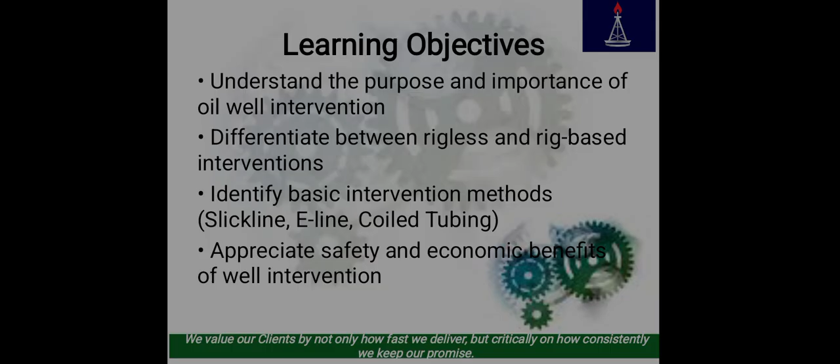Introduction. Oil wells are dynamic assets. Production and integrity change over time. Well intervention refers to any operation carried out on a producing or non-producing well to restore, improve, or manage performance without drilling a new well.

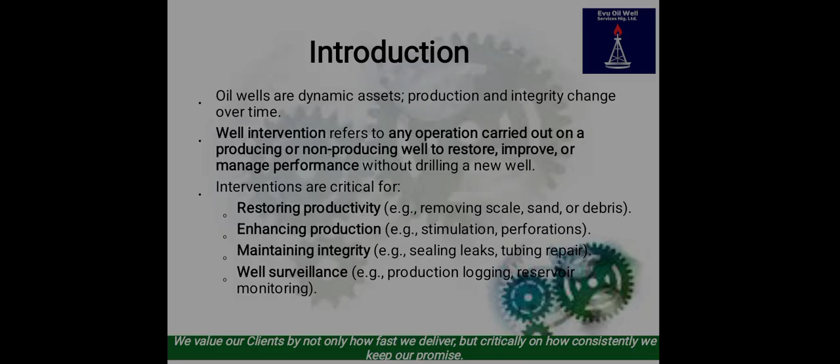Interventions are critical for restoring productivity, such as removing scales, sand, and debris, enhancing production. That's where we'll start talking about removing damages in the near wellbore through stimulation or reperforation, maintaining integrity - that is, sealing leaks, tubing repairs - then well surveillance, such as production logging, reservoir monitoring, and characterization.

We have two categories of well intervention, and the first category falls under light well intervention, which is usually the rigless. It's performed without a drilling or workover rig. Uses slickline, electric line, coil tubing, or light vessels. Quick, cost-effective, and less intrusive. Examples of tasks that require rigless activity: shifting of sleeves, setting of plugs, acid stimulation, well logging.

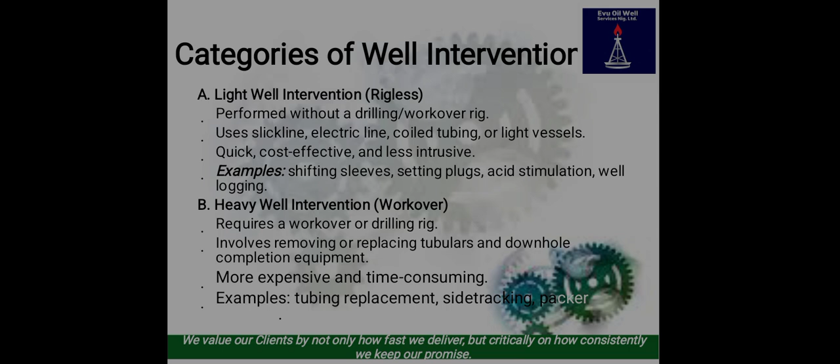This now brings us to the second category, the heavy well intervention, which of course is mainly the workover. It requires a workover or a drilling rig. Involves removing or replacing tubulars and downhole completion materials and equipment. It's relatively more expensive and time consuming. Examples are tubing replacement, sidetrack, and packer removal.

Methods of well intervention: we're having, like I said before, under the rigless, slickline. We'll be talking much on the rigless well intervention.

Now, there are a couple of things that you can use this slick line to do: things like setting of plugs, pulling of plugs, shifting of sleeves, fishing. Slick line can do those light tasks.

Electric line, otherwise known as the E-line, handles logging, perforation, setting tools using electric signals. Coil tubing handles pumping fluids, cleanouts, milling, nitrogen lifting.

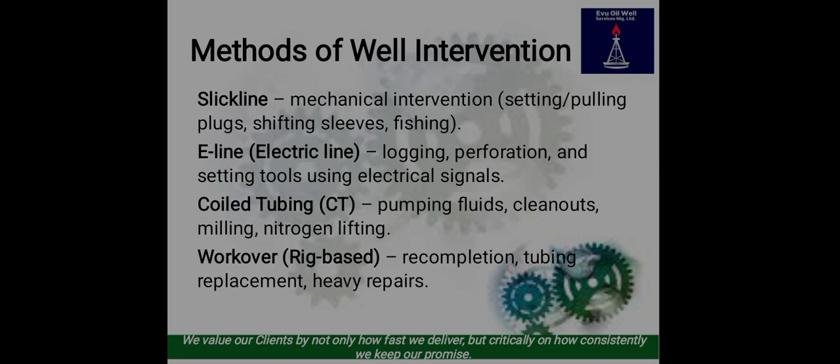Then the workover, the rig-based: recompletion, tubing replacement, casing replacement, heavy repairs.

Like the rigless intervention, which slick line, E-line, coil tubing falls under, they are usually relatively low in cost compared to the rig-based, which is higher in cost.

And the time for deployment and demobilization of each of the methods, they still differ. For rigless, the days are shorter. For rig-based, days are longer, which could span into weeks or months.

Then the kind of task that they handle: usually for rigless, they are light jobs. Rig-based, they are heavy repairs and recompletion.

What about the risk level? The rig-based operations have more hazard-related operations than the rigless operation.

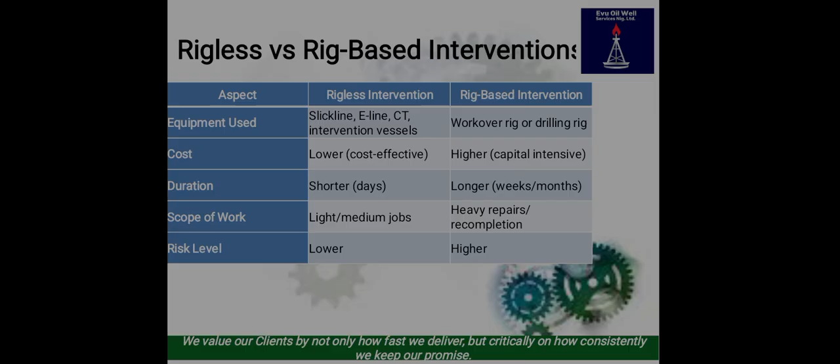Why wells require intervention? Why do we conduct intervention? Why do asset owners prefer to do well intervention rather than drilling a new well? When you have a decline in production due to scale, wax, sand, water, gas breakthrough, you definitely would want to

work on them, carry out maintenance on them, and this is only possible when you intervene, using either of the methods, rig-based or rigless.

Mechanical failures such as packer leaks, valve issues, tubing leaks, subsurface safety valve leaks, and so many light issues. Reservoir management, water shutoff, gas lift optimization, then surveillance.

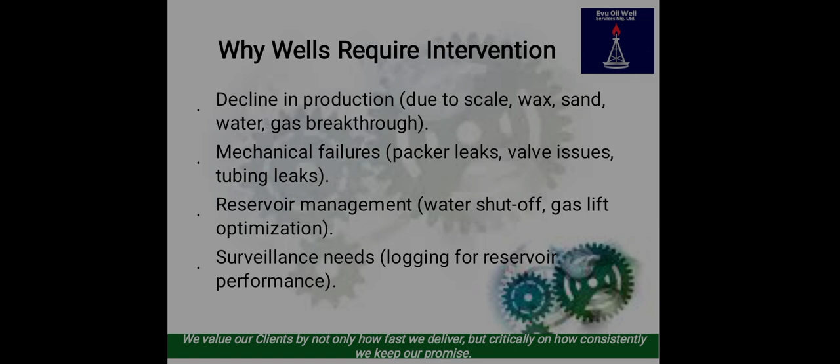Like I said, we usually run BHP test to get the pressure profile as at when they first drilled the well compared to what they are now having. All these are reasons why they intervene in a well.

Now, as you go through this slide, at the intermediate level, you would be required to watch the video clips showing slick line, E-line, coil tubing, and rig workover operations. You will now be able to know the remarkable differences as enumerated in the previous slide.

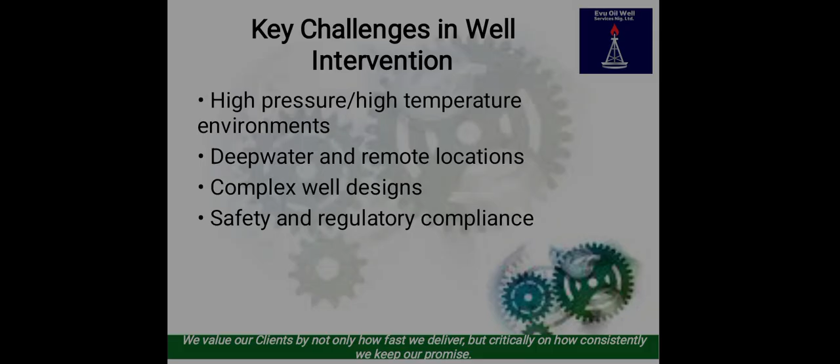What are the key challenges in well intervention? We usually come in contact with high temperature, high pressure environments, deep water and remote locations, complex well designs, safety and regulatory compliance, like from the DPR.

What are the technological trends in these well intervention procedures? We now, compared to those days, have digital well monitoring, real-time data acquisitions, a lot of advanced downhole tools evolving. Automation and robotics are things you now see in well intervention, making it simpler.

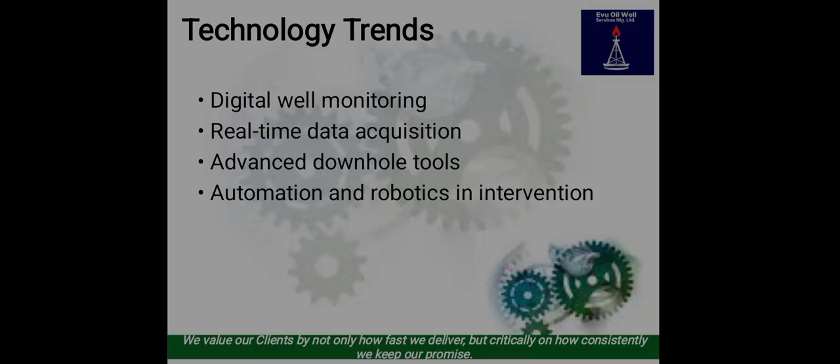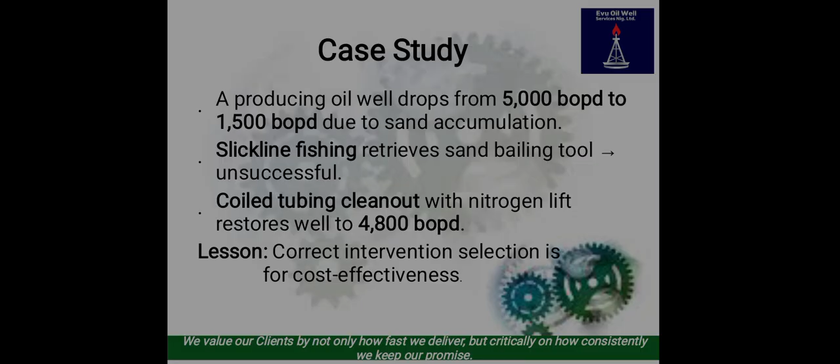What is the lesson here? Correct intervention selection is for cost effectiveness rather than going to drill a new well, like we said.

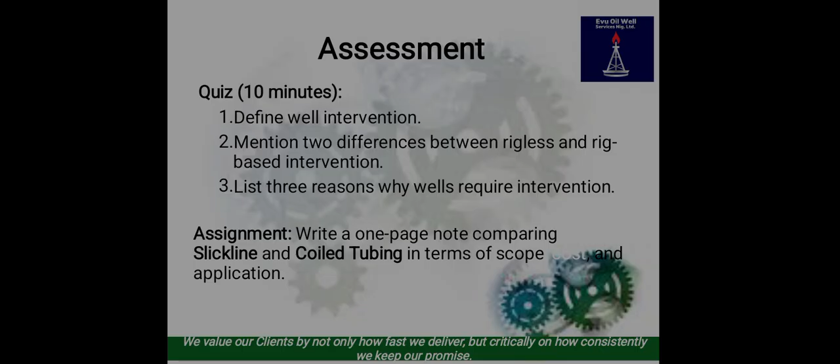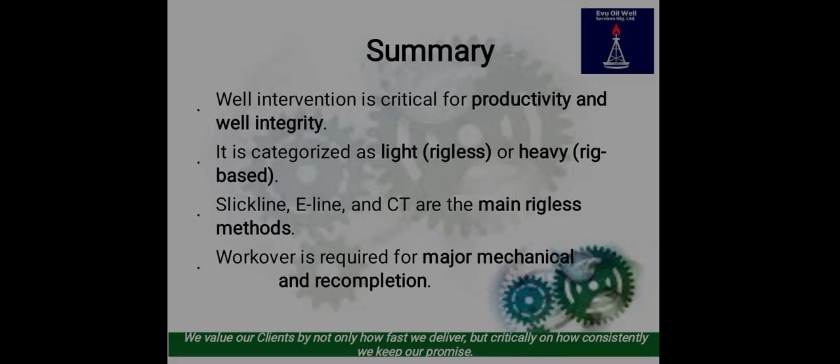Having said this, now brings us to the last point of this training module. I'll say thank you for your participation in today's introductory session. We explored what oil well intervention is, why it's important, and how it helps extend well life, ensuring safety and maximize production. Next week, we'll move into well completion and intervention fundamentals, where we will look closely at how wells are designed and completed, and why that knowledge is crucial for successful oil well intervention.